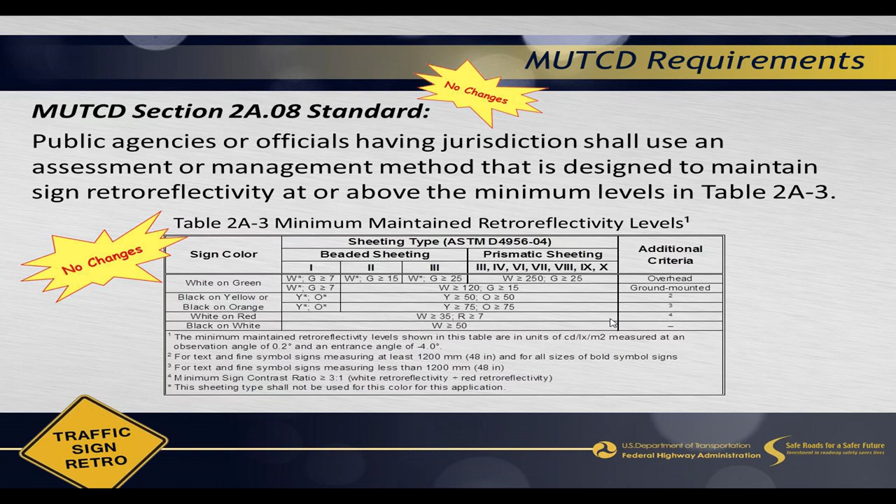So now I want to go back to the compliance dates after I've addressed this table and make sure we understand that. Again, there's no compliance date as far as the feds go for replacing your signs that don't meet those minimum numbers. But now you know there is a table with minimums in there, and you are required by standard to have a method in place that's designed to maintain regulatory and warning signs at or above established minimum levels.

So the standard still says you have to have a method in place to maintain the retroreflectivity of all your signs, but the compliance date only applies for your method for regulatory and warning signs. So what that means is you can stage this. If this is just too big of a deal for you to handle right now, to have a method to be assessing all your signs, including street name signs, you can just focus on regulatory and warning signs right now.

That should have been done already, but if you don't have it in place now, you need to probably get moving on it. And then as you get comfortable with your method and your system and your process, then as resources allow, you start adding your guide signs to your method and start assessing those, and then start figuring out, okay, we've got signs now that don't meet. What's our priority? Which signs should we be replacing first? When should we do that? Those are your decisions to make, but also your decisions to defend if questioned on it.

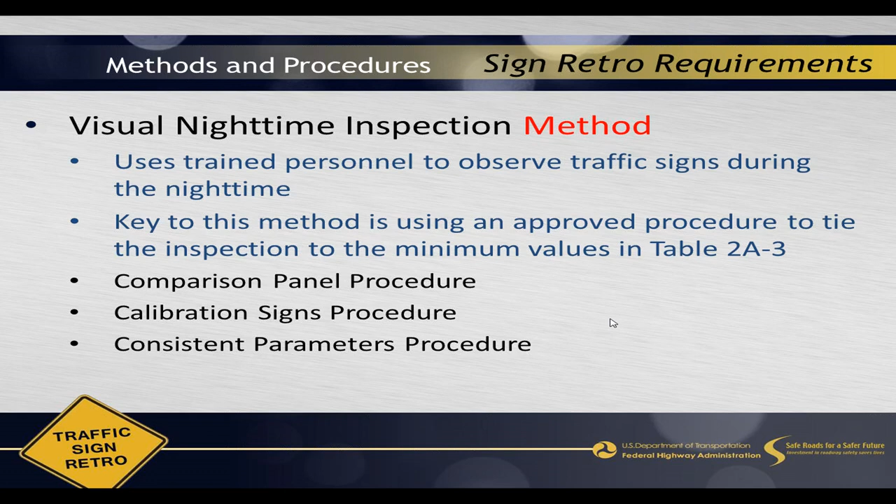So your trained inspector views roadway signs at night. And the good thing about when you do a nighttime inspection, for those of you that have done it, most signs are fairly easy to say, you know what, that sign is good. There's no question about it. Or signs are dead, dead, dead, and you know they're bad. They're not retroreflective. You know they're not going to be visible to the older driver. You know they have to be replaced. But the problem comes in when you have those marginal signs and you're trying to make a judgment. Do they meet the minimum level in that table or not? That's when you use your comparison panels.

You'll stop your vehicle, you get out, you clip those panels to your marginal signs, and then you stand back anywhere from 30 to 50 feet with a flashlight, and you hold your flashlight up next to your face. You shine the flashlight at your sign, and if the sign appears less bright than the comparison panel, the sign needs to be replaced because you're comparing your actual sign to a panel that's at the minimum levels.

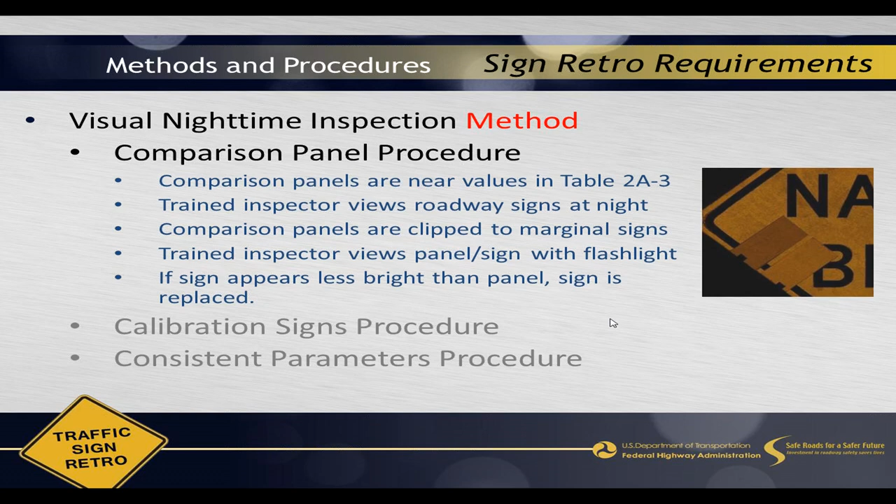Now if I'm comparing it to the other panel, the one on the bottom, is my sign brighter or less bright than that panel? It's pretty close. You could say it meets, but you know as signs degrade, especially in Florida, it's probably not going to make it past another year. So you might want to check it and put it on your list for replacement. So that's how the comparison panel procedure works. So we've covered that one.

Now let's go to the second procedure. We're still under the visual nighttime inspection method. We've just now decided to use a different procedure, and it's called calibration signs procedure. So calibration signs, just like the comparison panels, but they're full-size signs made at about the retroreflectivity levels in that table. Your inspection's still conducted at night. It's still conducted by a trained inspector. The way you conduct this procedure is you set up your calibration signs the night you're going to do your inspection. And you take a look at it from your vehicle at night, and the inspector calibrates your eyes. Okay, that's what signs at the minimum levels look like.

And then you go and drive your roads, and all the inspector is trying to do is make a decision. The signs I see on my road, are they brighter or less bright than the calibration signs I looked at earlier in the night? If the sign appears less bright than the calibration sign, according to the memory of the inspector, then that sign should be replaced. And people often say, boy, that doesn't sound like a very accurate method to me. I'm not going to use that.

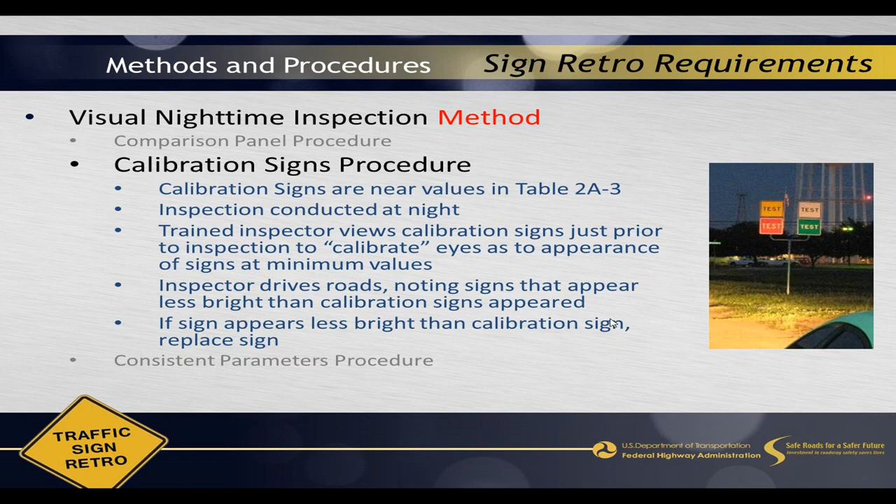You know what? The whole goal of this standard was to get rid of the bad signs on the road. This calibration signs procedure is not exact, but we've decided it's good enough. And it's a practical way of conforming to the standard. So if you wanted to use this procedure in this method, it would be allowed, and it is defensible in court. So that's how you use the calibration signs procedure. So now let's go to the third procedure, and that's called consistent parameters procedure.

Greg, question from the chat. Okay, what's that? The sign reflectivity requirement, this applies to all roads, not just state highway. This is local roads and city roads as well? That's correct. All roads open to public travel.

Wish I could see those chats. It would help me. Is there a way that I can? As an organizer, you should be able to. It's actually not in the chat. It's in the questions. Oh, okay. There we go. Pop out the questions, and then you can see them all on there. Yep, that'll help. Thank you.

And how do you measure the values for the test panel or the calibration signs is another question. Well, you can order them directly from a sign manufacturer, and then they come, and you know they're at a level that is close to those values in the table.

Or what some agencies are doing is they're replacing signs on their own. You're always replacing old signs. What they're doing is they're using a handheld retroreflectometer, either that they purchase or that they borrow or that they rent. And they're measuring those old signs that they have been throwing in a waste pile or recycle pile. And if they find a sign in that pile that's close to the minimums, then they cut that up and use that for their comparison panels. Or they could keep the sign whole and use it as a calibration sign.

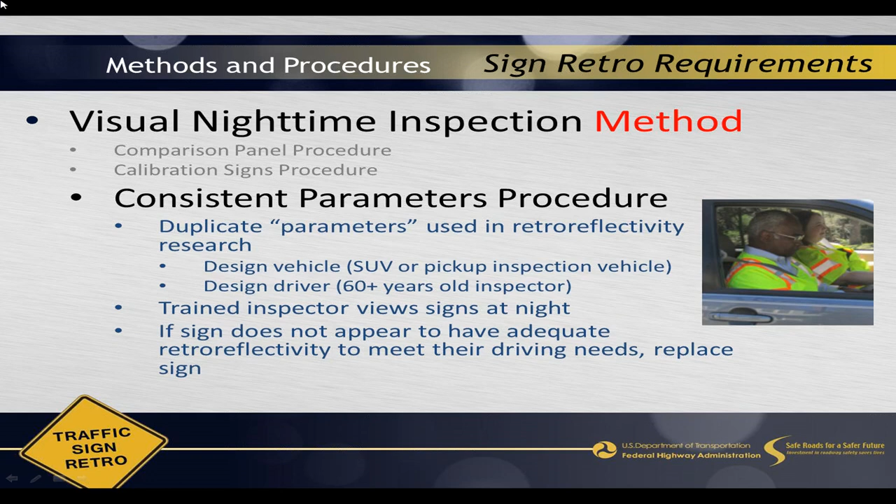This procedure can be done during the day. It almost always is during the day. It's safer and cheaper. The visual nighttime inspection method, where we went through those 3 procedures, all 3 of those need to be conducted at night. So this might be an option for you. Some people say, well, it's the only method that gives you an exact number to compare to the table. That is true. But again, like I've said before, the visual nighttime inspection, it's good enough. And that's why we've allowed it in the MUTCD.

So if you want something a little more exact, sure, use the measured. But those instruments aren't cheap, and it's fairly expensive to send out inspectors and measure every single sign. And you're going to have to do that periodically, maybe once a year or every other year. You've got to measure all your signs again.

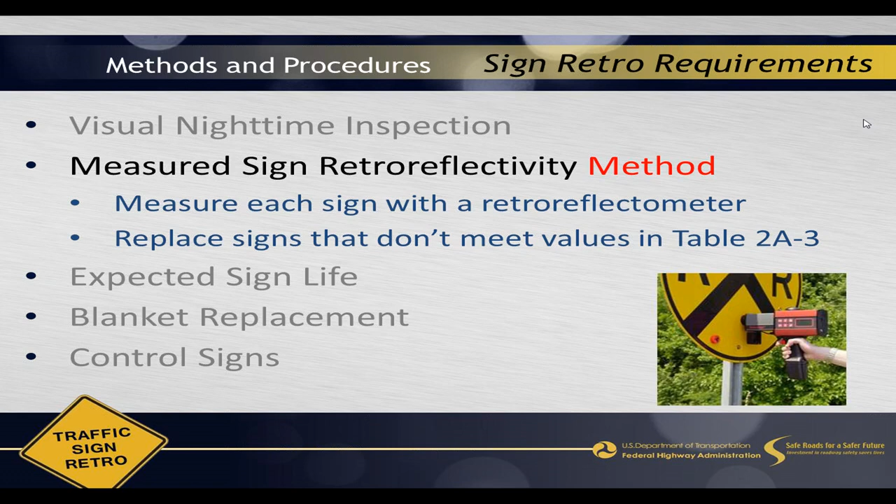So that's 2 of our methods we've covered. The third method is the expected sign life method. And that's where you need to know what type of sheeting you're using on your sign, and then you determine what is the appropriate sign life in my geographical area. So if I'm using a beaded type 3 sheeting, that's the common name, high intensity, you could probably get some information doing a little research online. You could get an idea of maybe how long those signs, high intensity signs, last in my area.

Your state DOT probably already has that kind of information, has a feel for how long certain types of sheeting last in Florida. And then what you would do is you track the age of each one of your signs, and you replace each sign before the expected end of service life. So what some agencies do is they take the warranty period from the manufacturer. So if a manufacturer says, I'm warranting your sheeting for 10 years, the agency is saying, okay, we're going to track the age of our signs and we'll replace them before 10 years expires.

But I have to tell you, from what information I've been seeing in research and from state DOT data, signs last quite a bit longer than the warranty periods. So if you're replacing them at the end of the warranty period, you're probably not getting as much out of your sign as you could. So you can save money by allowing those to go longer than just the warranty period.

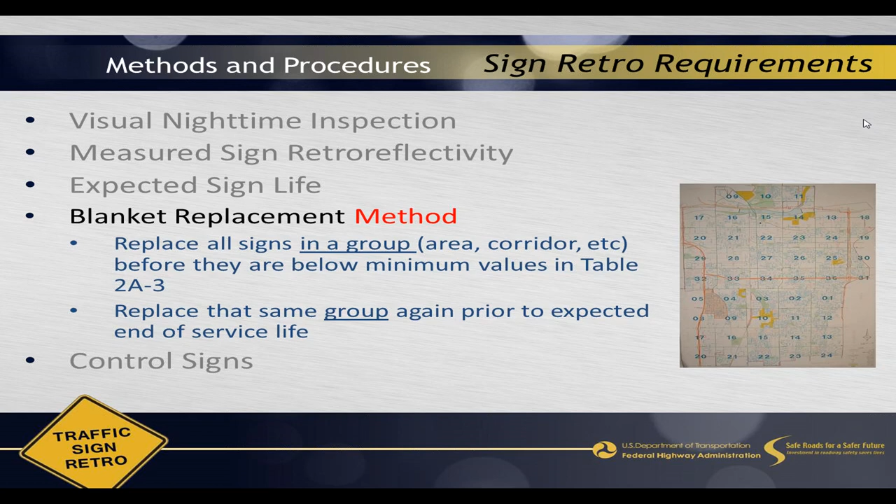It's pretty straightforward. Now I'm going to move into the fifth method that's allowed by the MUTCD, and that's called control signs. So this fifth method is similar to the blanket replacement, but what you do is you're going to replace a group of signs in an area. So you have a neighborhood or a section of your district designated. That's your group of signs. You replace all the signs in that group.

And then what you do is you just designate a subset of those signs to be the control signs. So say you replaced 300 signs in a group. I'm going to pick out 10 of those signs and designate those signs to be my control signs. And what you do is you just track the retroreflectivity of those 10 control signs. And when the retroreflectivity of those 10 control signs starts getting down close to the values in that table, you know that more than likely all the signs in that group also need to be replaced.

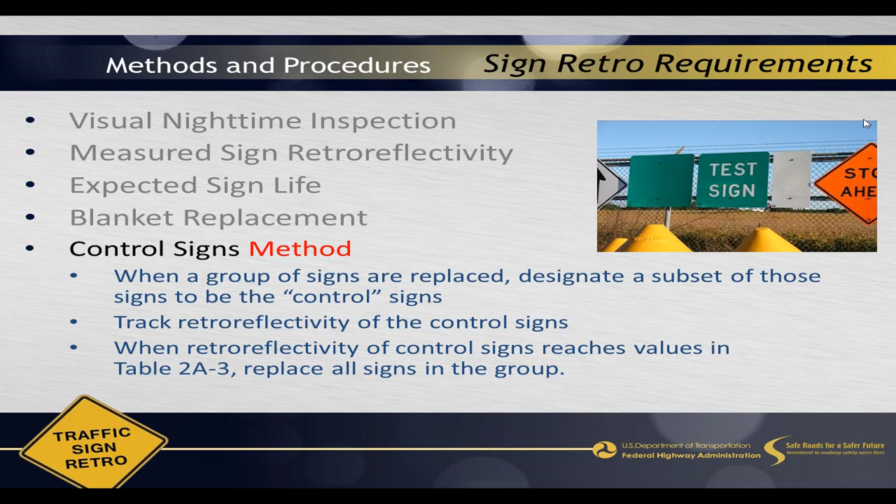A lot of agencies use the visual nighttime inspection method, but then they use the measured sign retroreflectivity method as a quality check periodically. And what some LTAP centers, local technical assistance program centers, do is the center buys a handheld retroreflectometer or two and then loans them out to the different members as they need them, because you sure don't need a handheld retroreflectometer an entire year. You just need to borrow it for a couple of weeks. So there's loaner programs set up. You can also rent these from the manufacturers of the handheld retroreflectometers. They rent them. I don't know what the cost is for doing that.

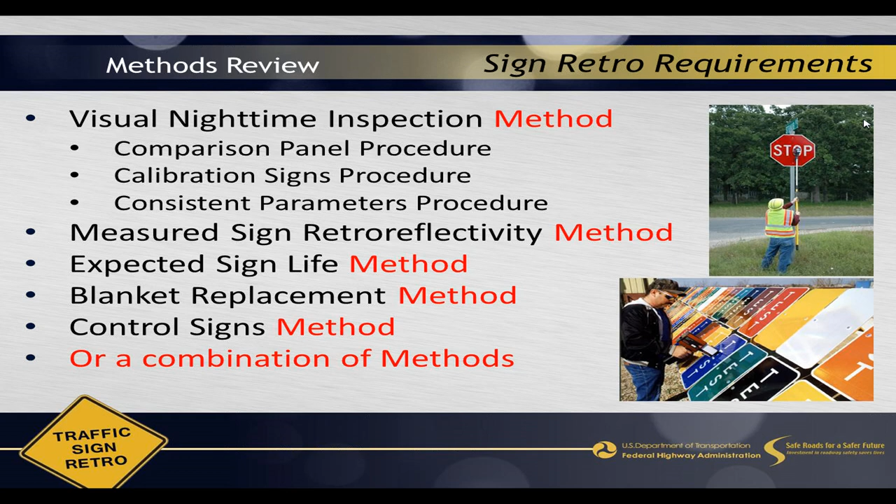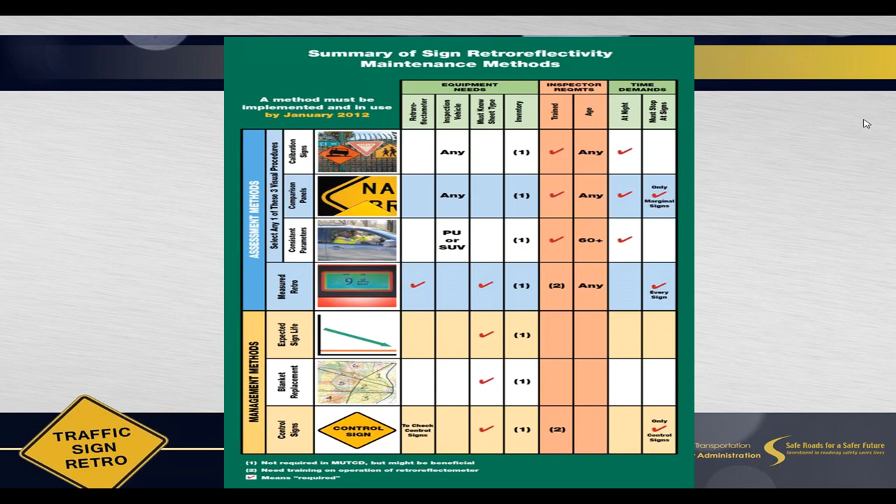So if I could pull up that next poll now, please. And it's asking a question about compliance. Do you think your agency is in compliance with the requirements that I showed you, that you have a method in place and you are implementing that method? Not necessarily that you are replacing every sign yet, but you have the method in place and you could defend yourself if questioned in court. And I'm only asking for those public agencies to vote on this.

Well, that's a real good percent. I think most webinars I give, I don't get that high a compliance rate. And of course, the onus is on you to decide whether you're really in compliance or not. But I normally get a lot lower, so you are doing really, really well, and I'm glad to see that number. Those of you in the other percent, the no, I'm hoping I'm helping you out a little bit, kind of understand what the requirements are. So let's go to the next one now, the next poll, please.

And that's asking about, do you believe your agency will be taking further action based on what you just learned here? Or you think you're all set and you're good to go? That's actually, I'm seeing about 2/3 saying to probably take further action. That's good to see also, because most of the time when I work with agencies on this and they learn, well, yeah, we are in compliance, but I can see where we may be able to improve our procedures and maybe save a little money by doing this or that, or modifying it and using maybe 2 of these methods instead of 1 and making sure we're in good shape.

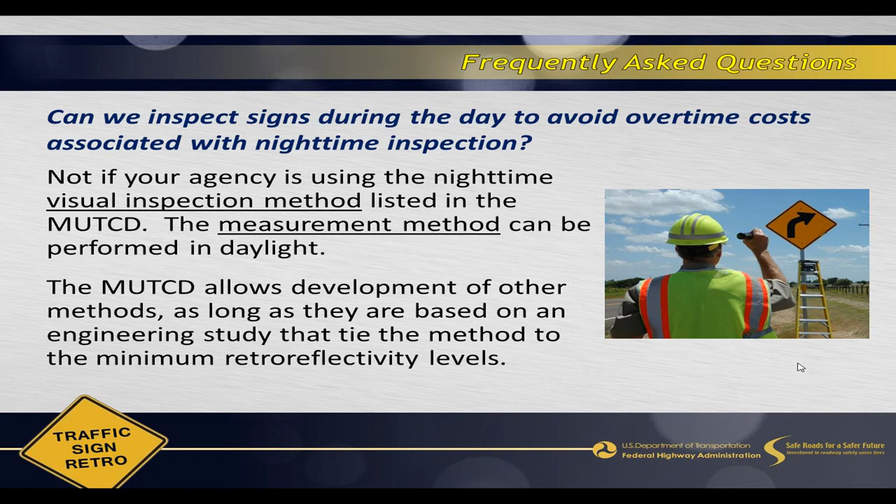And then this second sentence I have here: the MUTCD allows development of other methods as long as they are based on an engineering study that ties the method to the minimum retro levels. So if new technology becomes available, what FHWA is saying is that we're not closing the door on new technology. But any new technology you use as your method, you need to have an engineering study that proves it, and that study needs to tie that method to the minimum retroreflectivity levels in that table.

So here's another frequently asked question. If I use the nighttime visual inspection method, what are the requirements for the inspector? MUTCD requires a trained inspector but does not specify training requirements. It's important that your inspector understand how to perform the procedure in order to identify signs that are below or near the minimum level in the table. So again, I keep talking about the table and those minimum levels. I can't go out and just decide on my own whether a sign is good enough or not. I need to find a way to decide whether a sign is above or below the numbers in that table. And there's no way I can do it unless I follow one of those procedures I laid out.

Here's another question we get. We've been using nighttime visual inspection for a couple decades. Can I continue our system? I'll say it again. There are 3 very specific procedures that should be followed for your visual nighttime inspection method to comply with MUTCD. You've got to follow one of those procedures. There are some very large states in this country that have been using what they call a visual nighttime inspection method for a long, long time. But it's just a judgment call based on their inspector, and their inspector has no knowledge of those minimums and what those look like. So no, those would not meet the method requirement in the MUTCD.